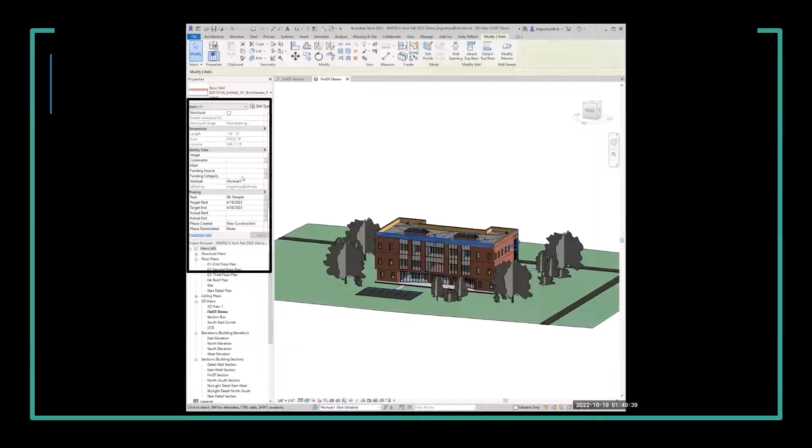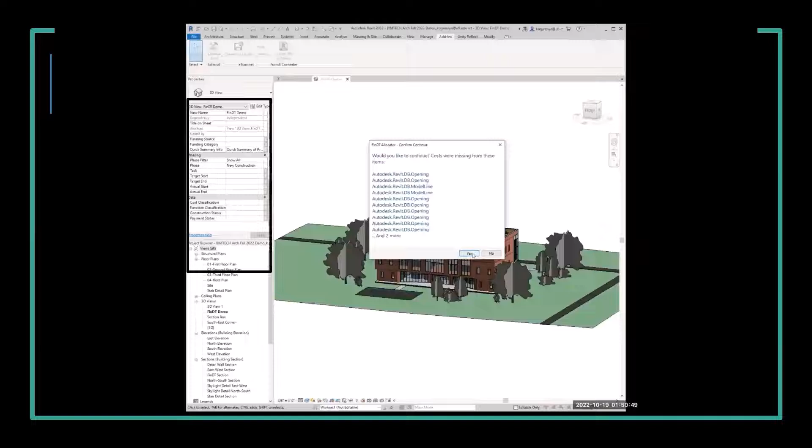In the first scenario, deploying the allocation function prompts the user to upload the relevant funding rules form. This is the template developed with construction finance in step 1 of the framework to guide compliant funding. Checks and balances built into the tool ensure that all model elements contain the requisite data, such as an estimated cost associated with them prior to allocation.

Once the allocation task is complete, the tool displays the total amount allocated along with the number of funding sources used for the project. In addition, a color code of the fund allocation is applied to the model. And now, selecting any element reveals its newly allocated funding source.

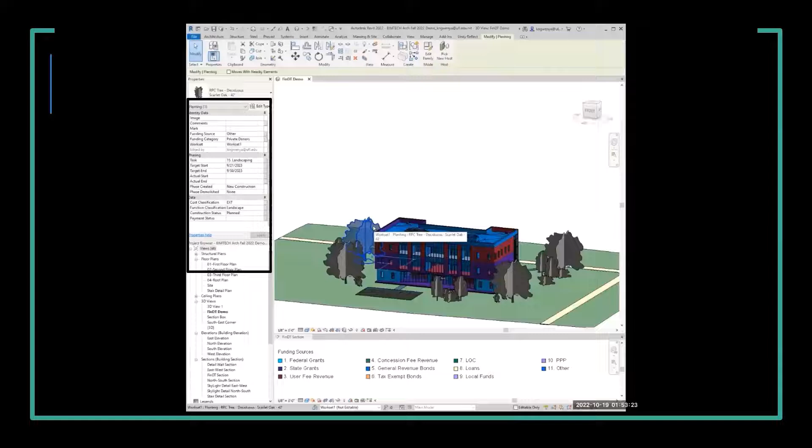A look at the quick summary now also displays information about each funding source allocated, including the amount and percent of the project allocated and any additional requirements for using that source, such as small business participation and domestic procurement requirements. All this information is now embedded in the model and can be monitored for compliance throughout construction.

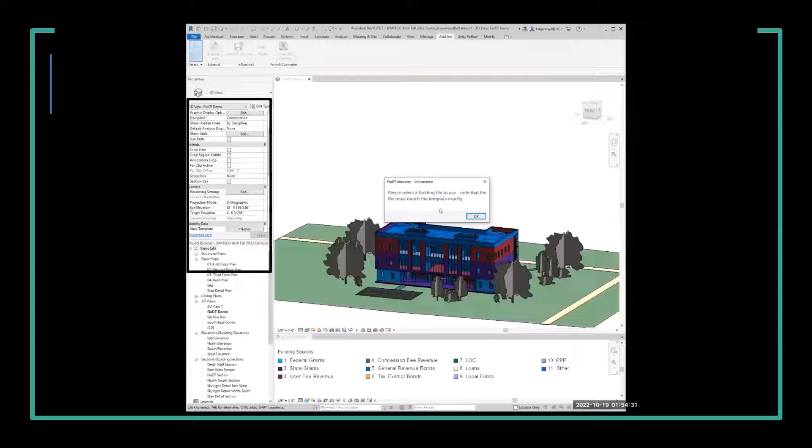In the second scenario, the update funding function enables the updating of an input form with additions or removals of funding sources, changes in amounts, and funding source ranking. The input template includes strategic level information for how funding sources can be ranked to maximize external funding and minimize the use of local cash resources.

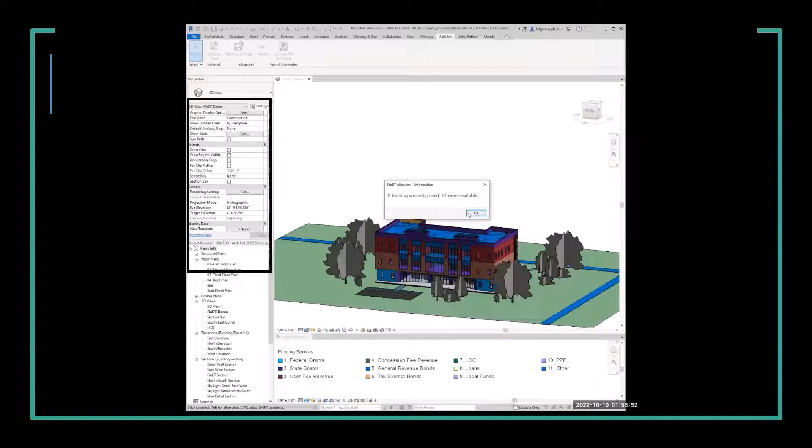An example of change management and funding availability includes the provision of unexpected funding sources with time restrictions during the course of the project. Adding the new funding source in the input form enables the tool to reallocate the funding, taking into account all sources, including the newly allocated source.

The quick summary highlights the changes in allocation with less sources used as the new funding has been allocated first, freeing up previously used sources.

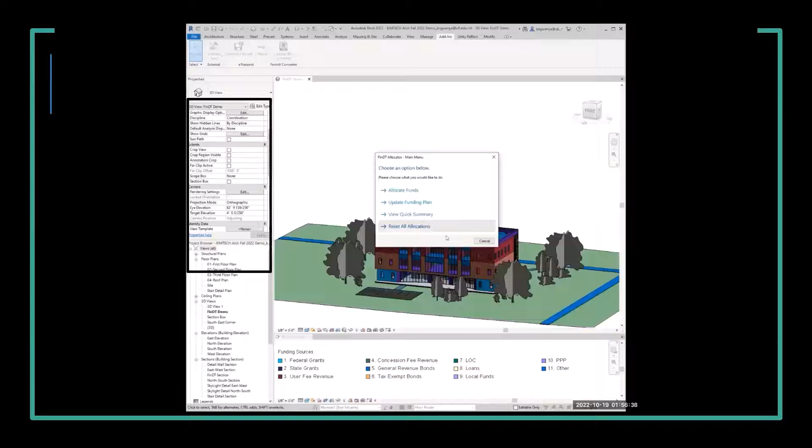Finally, the Reset All Allocations function enables the removal of all funding source allocation to the project, as can be seen by the disappearance of the funding colors.

A digital twin platform supports the building of a standalone visualization of the virtual twin of the facility to enable the visual analysis and review of planning and design concepts, and decision-making by multidisciplinary teams, many of whom may not interact with BIM authoring tools directly.

In this third scenario shown, the digital twin platform has been enhanced with the funding allocation information to aid the review process by providing a comprehensive project description and visualization.

The three custom buttons show the funding plan by highlighting the color-coded model elements along with the legend for the allocated funding sources. Toggling the quick summary shows the funding allocation details for review and decision support.

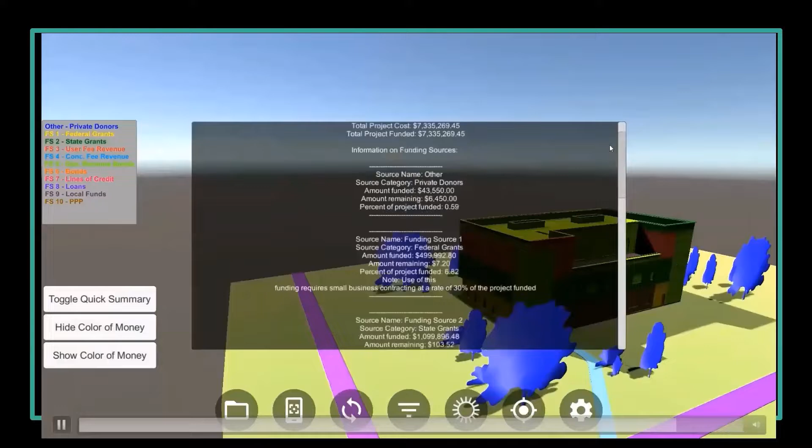The last scenario shows the interaction of a third-party application, such as Microsoft Excel, with the live virtual model data. In this example, the template has been created and linked to specific model information, namely the construction tasks, their duration, as well as the total cost of each task and the funding sources allocated to it.

The template is pre-programmed to visualize the planned incremental use of each funding source on a monthly basis for each funding source and so support the planning and budgeting of each throughout project acquisition.

Because it is linked to the live data of the digital twin, any changes to the cost, schedule, or funding sources in the digital twin can be updated with the click of a button to support the automation of this task. The template can be reused for all projects using multiple funding sources to be planned, tracked, and monitored.